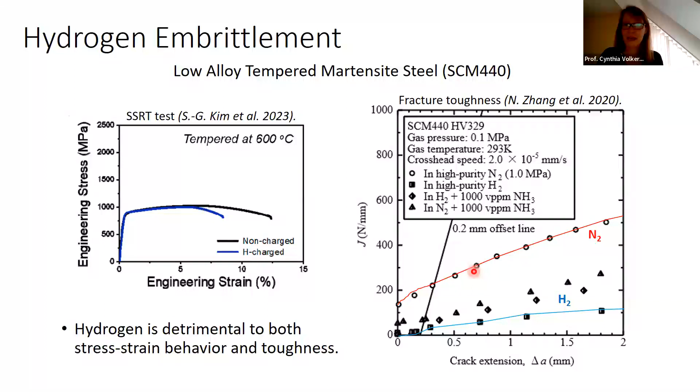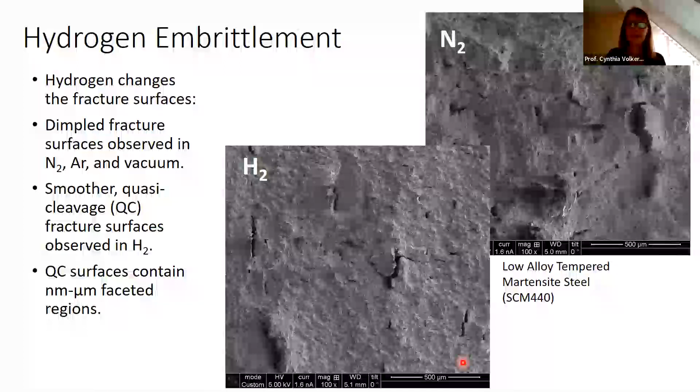If we go in and look more carefully, one finds very distinct behavior on the surfaces. At first glance, if you're not used to looking at these, you might think there aren't big differences, but in fact there really are important differences. If you look at the case fractured in nitrogen gas, and if it were fractured in argon or vacuum it would look similar.

We have features that we call dimples, small openings, and as concluded throughout the literature, these dimpled surfaces result from voids forming and coalescing at the crack front. What you see here is basically half of the surface of a void that has coalesced to form this fracture surface. You'll also see occasional round features like this one I'm pointing at - that is a precipitate, a carbide precipitate, found on the surface of these fracture surfaces.

Now if we look at the hydrogen case, it looks quite different. Here you see there are almost no dimples. You might argue there are some dimples over here, but to a large extent it's dimple-free, and what we have are small facets or small steps that are fairly flat. We also have some larger regions that are quite flat, and because macroscopically this looks flatter, as you saw in the previous micrograph, one talks about these surfaces as quasi-cleavage surfaces.

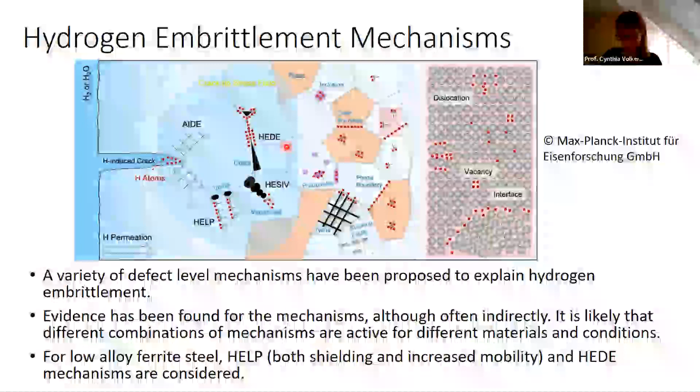It's clear that one wants to gain control of this hydrogen embrittlement problem, but as I've just said, it involves defect dynamics that are at the atomic scale. So if one wants to really understand which mechanisms are active, to find ways to mitigate the problem, one needs measurements and methods that give atomic scale resolution and sufficient temporal resolution. That's already a challenge. In addition, hydrogen is the hardest element to detect because of its lightness. And let's add to that the fact that crack propagation is typically very often an unstable process.

So if we want to look at what's happening at a crack tip, we have to find a way to control the propagation of the cracks. These are the challenges one has if one wants to look at this problem at the atomic scale, and with time dynamics, we need some kind of temporal resolution. I think it's clear that a single experimental or theoretical method will not be able to do all of this, and a variety of methods must be used.

The one that we want to offer here is in-situ transmission electron microscopy. The promise of that is that it gives almost atomic scale imaging of dynamic processes. Real-time resolution is easy in the microscope, and if one has a lot of funding for expensive cameras, one can also go to even shorter temporal resolution, faster resolution in the time regime.

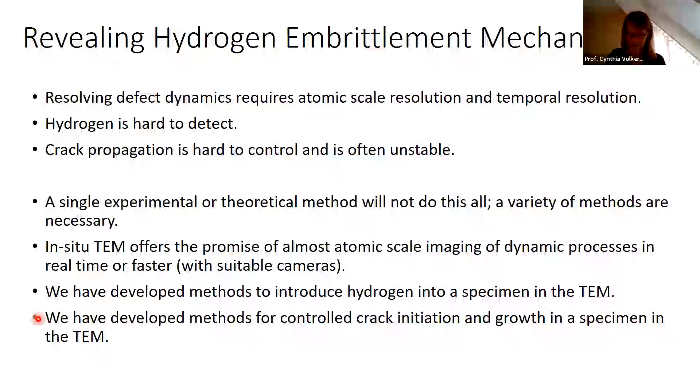But there are, of course, some challenges to the TEM results, and I want to start with those and be upfront about them. Let me list them here. The first is simply the fact that the electron beam does produce damage in a material.

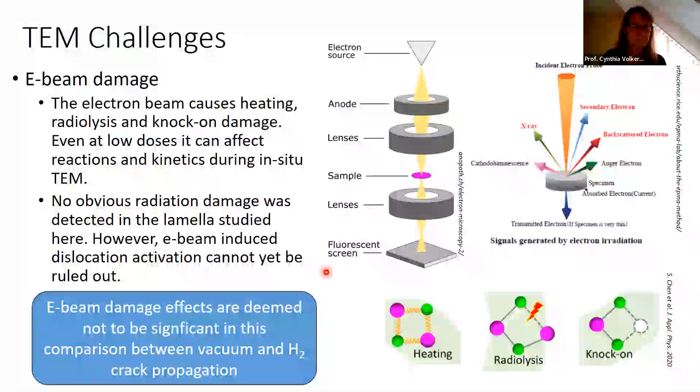Another thing that's always a question, particularly when one tries to introduce hydrogen into these microscopes: there are so-called environmental microscopes, which is what we have, allowing us to put low pressure—up to around 10 millibar—of hydrogen into the chamber. The studies you'll see today are performed at 2 millibar. For all of those who work with hydrogen embrittlement who will say that's not enough to get anything to happen—room temperature and 2 millibar of hydrogen is not going to cause anything in ferritic steel...

Despite that, in many different materials, various studies across the world by groups that have these environmental TEMs have found that despite these low pressures and despite room temperature, one sees hydrogen effects on the material. So the conclusion is that in some way the electron beam inside the microscope is significantly increasing the fugacity of the hydrogen, so that we're producing enough hydrogen in a state that it can get introduced into the ferrite in this case, or into the other materials in other studies, that in fact we do have significant hydrogen in the material.

Now, there are known cross sections for electron-induced gas phase dissociation. And if one simply uses those values, we would predict an increase in the amount of dissolved hydrogen over what one would expect for 2 millibars at room temperature by a factor of 100. Might be enough to make some difference.

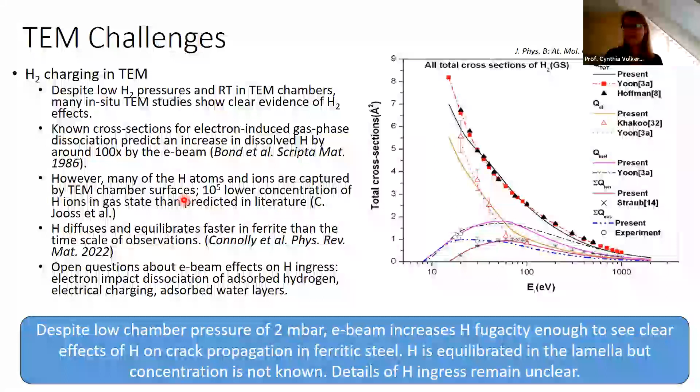One thing we can say is that in ferrite, for the time scales and length scales we're dealing with in these lamella, the hydrogen will have had time to diffuse and equilibrate. So whatever concentration of hydrogen we have in the specimen, it's been able to find its preferred sites within the material, and it's free to move and equilibrate there. These are huge issues one has to think about. In our case, the result is we don't know what the concentration of hydrogen in our specimen is, but whatever it is, we believe it to be equilibrated.

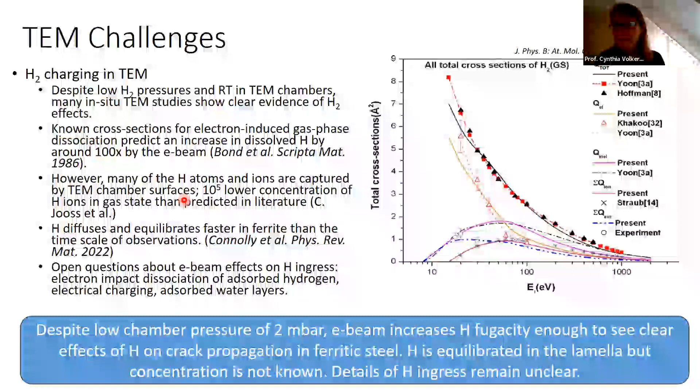If we think about a bulk specimen, out of the plane of the view graph the material extends infinitely, or quite a long way. So the stress state here is what's known as plane strain, and the so-called triaxiality is high, which means that plasticity is low. If this is a thin film like a TEM lamella, then plasticity becomes much, much higher - we're in a situation of plane stress. The nature of these stresses, this triaxiality - whether all the stresses in all three directions are equal - is a measure that's very important because it controls the amount of plasticity that can go on. This is completely different in a TEM lamella than in a bulk specimen, and this is a difference we cannot ignore.

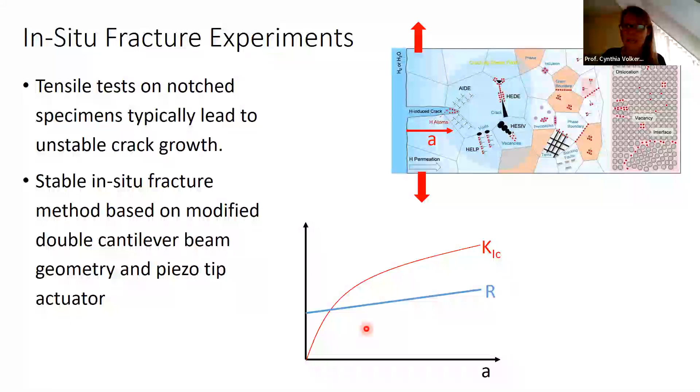So we made a different design, which is a modification of the so-called double cantilever beam geometry. You can see the geometry here. We cut out two posts of material with a thin lamella in between, around 150 nanometers thick, which we look through with the electron beam.

We cut a notch in this material, and then we come in with a wedge-shaped tip and pry these two cantilevers apart, causing this notch to form a crack, initiate it, and propagate down this lamella.

Now, the advantage of this geometry is that the K1C, the stress intensity factor, decreases as you move down, simply due to the bending moments of the two cantilevers at the side. So the geometry makes it harder—we have to push harder to pry it apart—and that gives us, in a very simple way, much better control over propagation of the crack. That's the trick we use here.

It's been used for a variety of different studies over the years, where we started out without the hydrogen to make our life easier, but our goal was eventually to get to these studies that I'll present today.

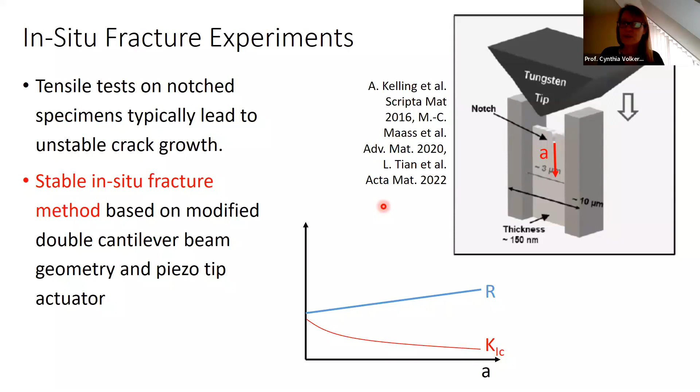I would like to show, just because it was really fun for us, a study that we did on wood using this method, just so you can see what kinds of things can be done with these kinds of methods. Now, wood, as you know, is a material that if you try to fracture it across the grain, it's very difficult to fracture, whereas if you fracture it along the grain, it tends to fracture quite easily.

We wanted to understand this fracture along the grain, which is otherwise difficult to study because it's unstable. In our case, because of our method, we could watch this propagation along the grain in the wood. Now, wood is very susceptible to electron beam damage, and the image you see here is from an SEM instead of a TEM, and that's where this study was performed. The TEM was too destructive. We had to work in the SEM.

I won't go into the details, but we were able to watch these cracks propagate, and you see a sketch of what we observed here. The thing that we found really fascinating about this is we believe that learning from the structure of wood, this study showed a new concept for how one can make fibrous materials tougher.

The basic idea in wood is that it's arranged the fibrils so the cracks are steered to a particular interface. At this interface, the fibril direction changes, and the cracks get hung up. They have to stop, they have to tear and rupture the fibrils, which requires a lot more energy before they can continue on. So basically, the material is designed so that it steers cracks to a very tough interface, and the cracks get trapped there.

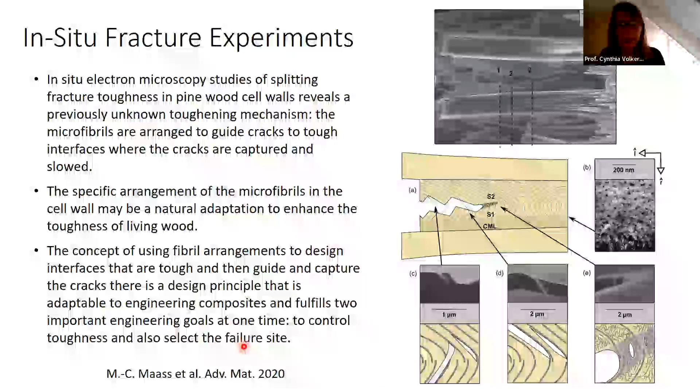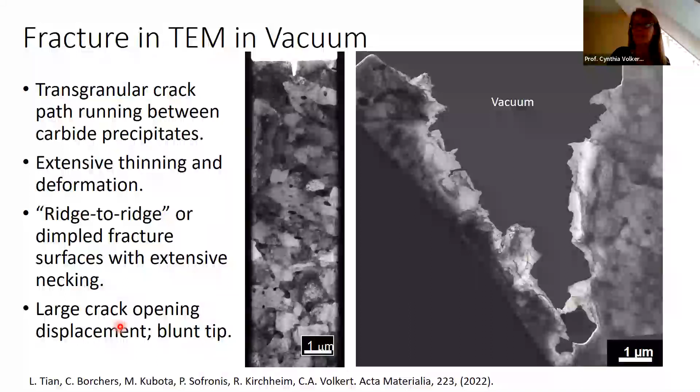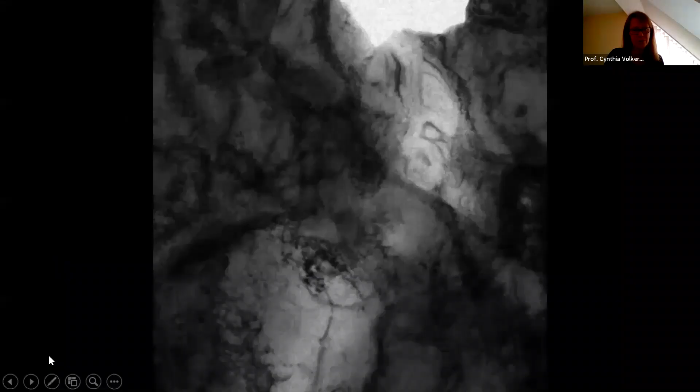And now I'd like to show you a video of this. So here in this image on the left, you see the notch that's been produced and a crack that's been propagating. You can see it's quite blunt, and this is a thinned region ahead of it. Now we're going to see what that looks like in the TEM.

There's a lot of things going on here. What one sees are a variety of things. I think I'm going to play it a second time. You see contrast from bending contours—that's simply from changes in thickness, or bending from diffraction.

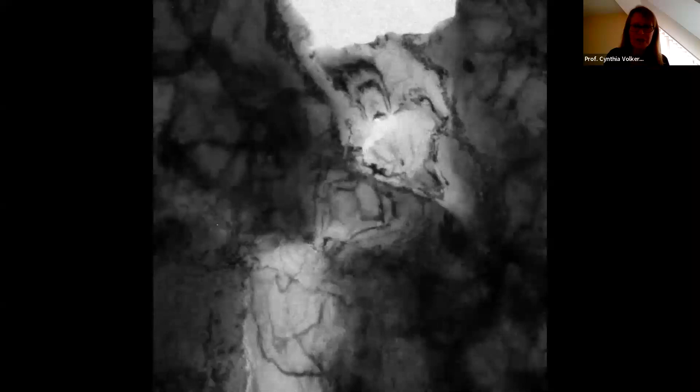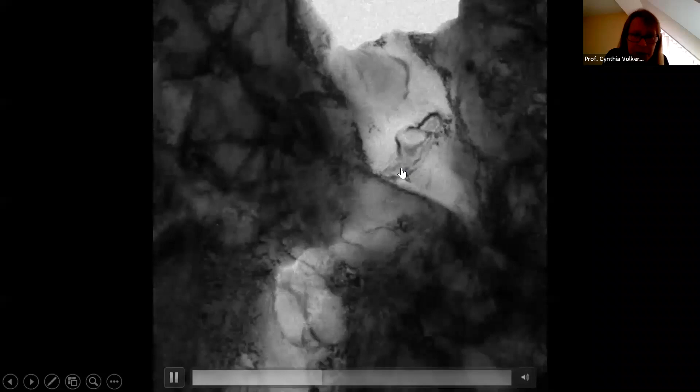You see voids opening up, nucleating and opening up ahead of the crack tip. So here's a void opening right now, and there'll be one opening further up down here as well. So there's a chain of voids opening ahead. A lot of the features you see are bending contours, but there's also dislocation motion going on. So that shows you what it looks like.

Here you can see the tip emitting dislocations. Most of the features you see here are in fact the rapid motion of dislocations, and they appear to be emitted from the crack tip in this case.

So these are the types of images Lynn made in a number of these tests. What you see here is characteristic of this material. During each test, the crack propagated through many grains, so each test involves a variety of different grain orientations and microstructures. What I'm showing you here is characteristic of this behavior in the vacuum.

In the TEM, we see that the holes nucleate ahead of the crack tip, and they join up and coalesce, and that's how the crack propagates. So here it is summarized: you can see it thins down first by dislocation activity, and once the region is thinned, holes open up in the lamella, between the precipitates rather than next to them, and they then coalesce, giving a crack path that moves through the ferrite matrix.

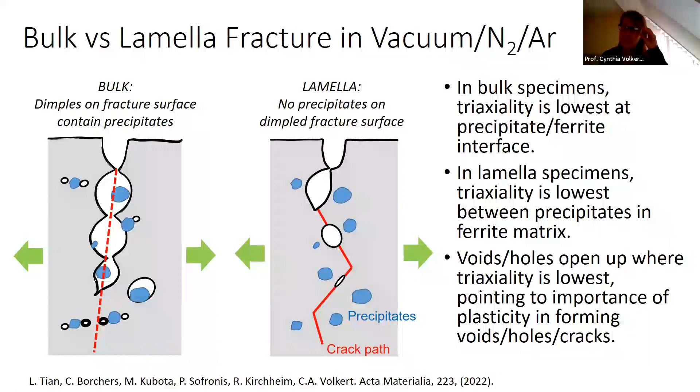So in our opinion, we can bring the TEM results and the bulk results together under one picture, and argue that what we're seeing in the TEM reveals mechanisms that may also be controlling in the bulk case. There are some important differences due to the differences in stress state, resulting in differences in the fracture surface. Now let me go on to the hydrogen case, which is of interest here.

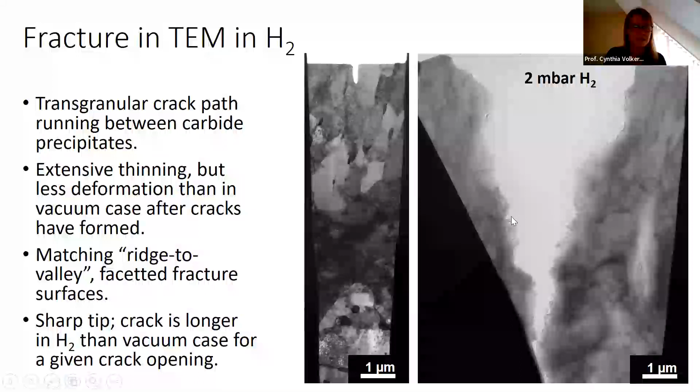Let me show you the video so you can see how different that is. Here's our notch, and you can see something just happened down here. You're going to start to see a zigzag crack opening here in the material. You can see this crack now quite easily. There's still a bridge up here, but that's going to open up and the crack is going to propagate. So what one sees here is a very, very different process.

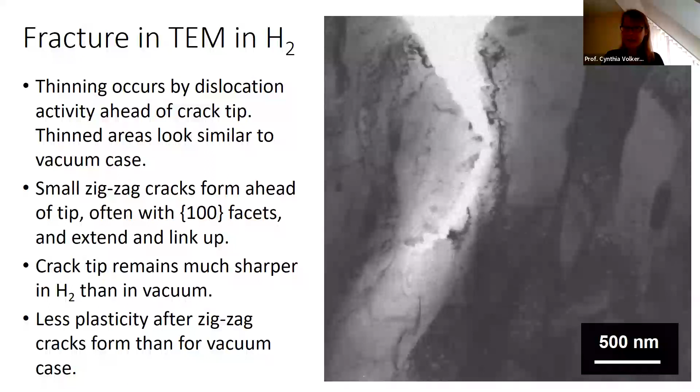This is something Liang observed not just one time, but in several specimens, and in different grains as the crack moves through the specimen. So what one sees is that thinning occurs as before due to dislocation activity, but ahead of this crack tip, instead of holes opening, we form these small zigzag cracks. They grow and link up, and that leads to propagation of the crack, so the crack remains sharp even though there has been significant thinning to begin with.

If we look very carefully at these surfaces, you can see they tend to have 100 orientations, these facets. They're not crystallographically sharp, but the tendency to be lined up with the 100 surface is very prevalent. Sometimes we form new grains, and that happens for both hydrogen and vacuum. I won't be talking about that much in this talk, but we see what we call the zigzag crack formation, and that's something we do not see in the vacuum case. So this is a distinct feature of the hydrogen fracture case.

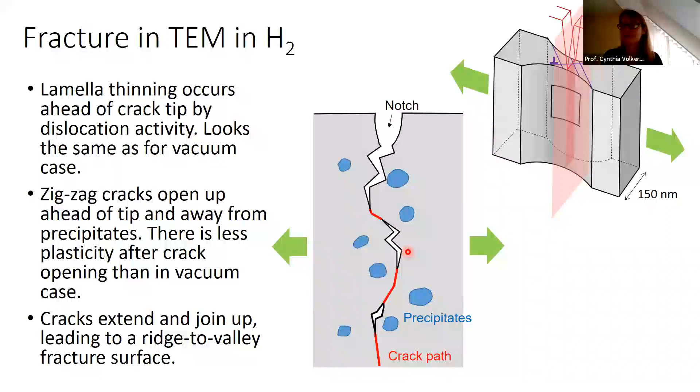Summarized in this schematic, we first thin down ahead of the crack tip, as you see here on the upper right, and then the crack propagates by formation of these zigzag cracks on 100 facets ahead of the crack tip. These link up and lead to a ridge-to-valley fracture surface, which is very distinct from the ridge-to-ridge fracture surface we have in the case of vacuum. Summarized here, the difference between the two - these dashed lines are meant to indicate the thinned regions. We see a very distinct difference in how these cracks form and in the resultant crack surfaces.

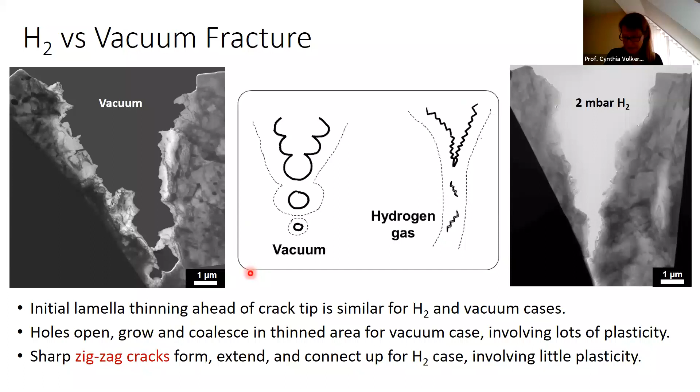So the question we have now is, why are zigzag cracks forming? What are the possible mechanisms for that? And why is that promoted by hydrogen and not observed in the vacuum case?

There is a study out there on gold without any hydrogen showing zigzag structures. It's not something we found to be very common in the literature, these kinds of structures. In that study, they explain this by arguing that these features are formed by either shearing or twinning, activated by whichever has the maximum resolved shear stress. So the simple picture is that if the applied stress activates dislocations for shearing or twinning, then that's what will happen, and the deformation results in these zigzag surfaces.

For our case, if we look down, we can see we have quite similar type of features. We could argue that if dislocation motion in the hydrogen case is easier - the HELP mechanism - then we could imagine the following scenario: dislocations like to glide on 110 planes in BCC iron, and if we have that happening unimpeded at a crack tip,

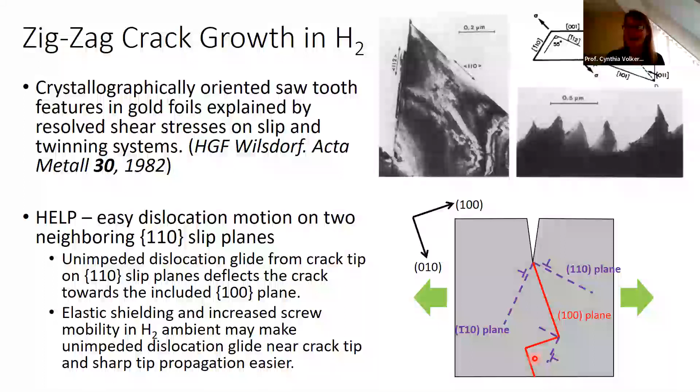The other argument one could bring here is based upon the decohesion model. If, for instance, hydrogen lowers the surface energy of the 100 surfaces significantly, then one could imagine that as we thin the lamella down in front of the crack tip, eventually the stresses are high enough to cause cleavage along 100 surfaces. There are some calculations supporting the reduction of surface energies also on 100 for ferrite. However, the effects tend to be small, on the order of 10%, and the general feeling is that might not be enough to account for this effect.

It does, however, depend upon the amount of absorbed hydrogen, so it's a little bit difficult to say. It seems to me that both of these mechanisms remain possible arguments for what we're seeing in our material.

I'm getting just about done.

I would like to now go to the question of what we learned in the lamella case for hydrogen: can we use that to explain the quasi-cleavage fracture surfaces that are observed in bulk specimens?

We believe that's the case because our surfaces tend to be somewhat straighter and flatter. We would argue, it's a fairly phenomenological argument, that if the crack tip remains sharp, the crack will tend to propagate where the applied stress sends it, and it's less sensitive to the microstructure, so it will tend to be flatter to begin with.

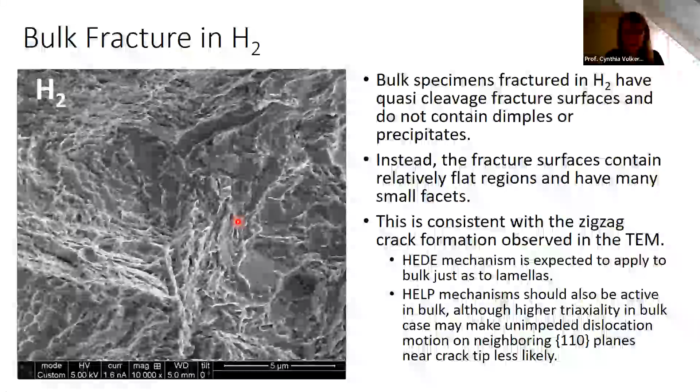Both of the mechanisms I propose could be active in the bulk case as well. We're unable at this point to tell you which mechanism we think is dominant here. Maybe both of them are active—that can entirely be the case.

This is a rather long list summarizing what I've basically just said. The point I want to bring up is that in both specimens, before the crack propagates, there's significant thinning. So far we have not seen a difference in the effect of hydrogen in that initial plasticity ahead of the crack tip. That's something we're going to look at very carefully, because that's basically the evidence for a HELP mechanism—it would argue that the plasticity should be different in the two cases. So far we have not seen evidence for that, so that's something we need to look at more carefully.

But once it's thinned and the stresses are high ahead of the crack tip, we see very distinct behavior between the hydrogen case and the non-hydrogen case. In one case we get holes opening and dimples forming, and in the other case we get these zigzag cracks, which we think can account for the quasi-cleavage surfaces one finds in bulk materials.

I know I rushed through these things at the end, but as is often the case with research, we've seen a lot. We've got a lot of observations, but we have more questions and more studies we need to make in order to really tackle which mechanisms are dominant here. But we think these kinds of methods offer an important way to understand what's going on in these materials, and that it's possible to extrapolate from the stress states of the TEM lamella to the bulk geometry if one takes care. And with that, I'd like to thank you for your attention, and I'd be very happy for any questions.

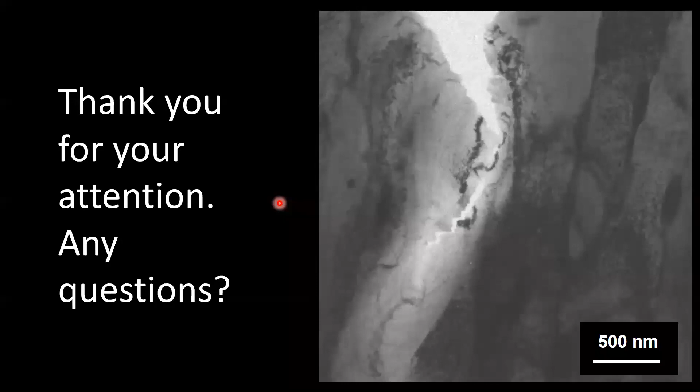Can I ask a question? Please, Professor Makadore. Yes, thank you very much, Professor Volkert. I have many questions like Professor Kubota. The main one is actually the one you mentioned at the beginning—I think it's the question everybody has when you have an atmospheric cell with the TEM: what would be the equivalent? Like you said, you have very low pressure, but it's activated by the electron beam. It would be very nice in the future to know the equivalent fugacity or pressure, but like you said, that's a very difficult question. Related to that, I've also been working on looking at data from pure iron with hydrogen before, and one of the last calculations I've seen was by a group with Dr. Yu in 2020. They reported that in their calculations they didn't see any evidence for the HELP mechanism, and they reported only that the dislocation core would change with hydrogen—specifically the core radius.

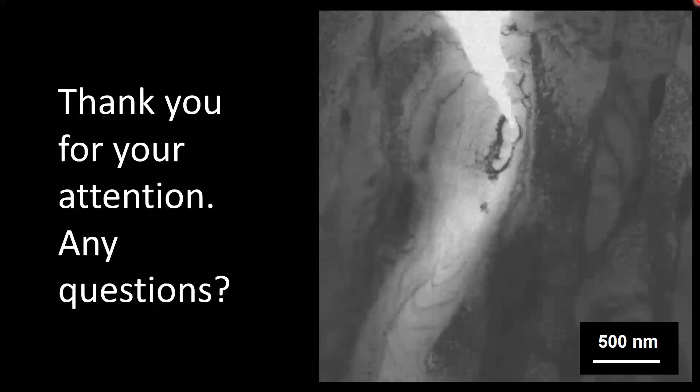This has also been hinted at by Professor Barnoush with nano indentation, who said maybe the shear modulus decreases with hydrogen, and maybe the core radius increases. There have been a few papers so far, mainly calculations. The main issue with calculations, as you know, is similar to the issue with thin lamellae compared to bulk: it's only a few dislocations and a few atoms, so it's very difficult to get the effect of the group of dislocations. A lot of data seems to hint that the shear modulus will decrease with hydrogen, but not much data confirms the effect on the stress field of dislocations.

So I'm wondering what your views are on these. Basically, some people have also said that because the electron beam activates the hydrogen a lot, what we see in TEM would be something that cannot be seen under usual hydrogen exposure conditions, because the fugacity is too high. So it's a true thing that's happening, but it may not reflect reality at room temperature and usual hydrogen gas pressures. Sorry, I'm rambling a bit, I want to know your thoughts on those random questions.

Okay, thank you, those are really good points you brought up. I'll say a few words about the fugacity, though I don't think I'll be able to answer your questions in full detail, but we'll have opportunity to discuss this further. Your point about fugacity is possible, that it's raised to unphysical values by the electron beam. That's something we simply don't know, and I don't know of a way to determine it, because it depends on all kinds of things, like where you're looking on the specimen relative to the edge of the holder, and details of the chamber geometry that will differ for every experiment. I think coming up with a specific prediction for the hydrogen fugacity in the TEM will be very, very difficult.

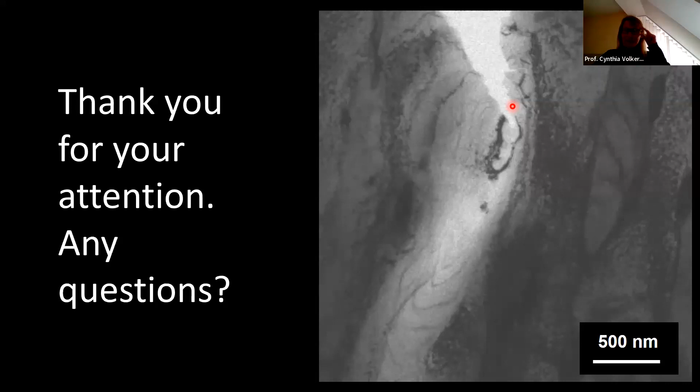As far as the shear modulus, I need to look into those - I'm afraid I'm not all that well informed about where that stands. You can have a change in shear modulus because you've changed the bonding, which of course requires a very high concentration, or one has inelastic or anelastic contributions. Maybe we discuss that here further, or maybe we save that for another point. In the meantime, I will look into that literature more carefully.

Thank you very much, you make a good point about the lattice constant. Actually, I've seen it in stainless steel by XRD.

We can see the increase of lattice constant with the increase of hydrogen exposure pressure. So maybe there is something to do like bulk measurements and then compare with what you see in situ with the TEM.

The point about the shear modulus is that, from reading a book mostly by chemists about hydrogen embrittlement, it seemed obvious to them that the bond would change from a more metallic aspect, switching between metallic and covalent bond, from one to the other. But I don't think it's been so much talked about in the more material mechanical engineering community, so it's something I think we should look at.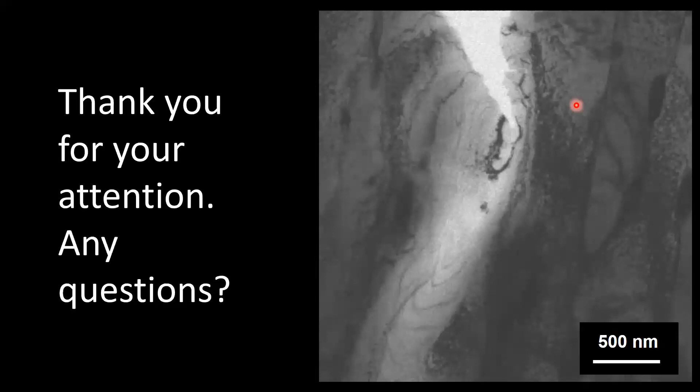So anyway, it's something that's hinted at in the literature, but has not been completely confirmed yet. I think it's an interesting point, but we should look into it. Sorry for the rambling again.

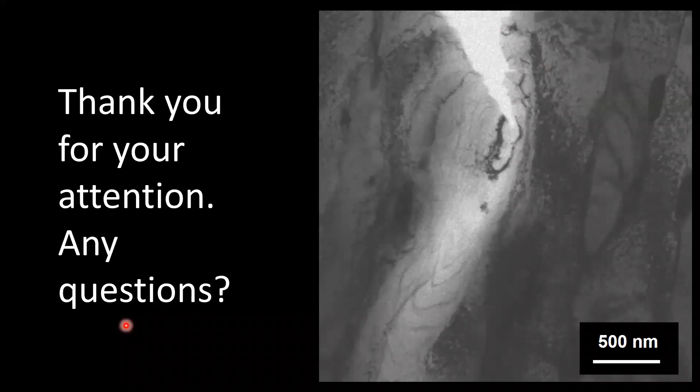Thank you, Arno. So 2 millibar hydrogen is enough to change the fracture mode. So if the hydrogen pressure is 1 millibar or 0.5 millibar, what happens? Can you expect anything?

Without the electron beam, 1 millibar of hydrogen at room temperature in ferrite, I do not believe will lead to significant dissolved hydrogen to change the crack propagation behavior. That's something I have learned from talking with you and colleagues—we would not expect that to change the crack behavior. And that's why we conclude that the electron beam and the conditions in the microscope are significantly enhancing the fugacity of the hydrogen.

We are not the only ones to see that. There are many studies on different materials, in different countries, with different microscopes, that show that very low pressures of hydrogen, below what would be expected outside of the TEM to produce an effect, can produce a large effect in the TEM. So the fugacity is raised, I think, is clear from the observations. How it's raised remains a mystery.

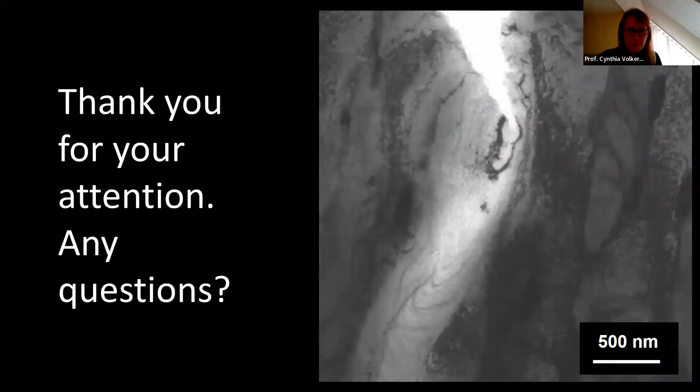Yes, these specimens were prepared by focused ion beam. I was trying to move back to the image of the specimens—they were prepared with the focused ion beam, and there is of course damage at the surfaces. So this geometry you see here is all cut with the focused ion beam. That's correct.

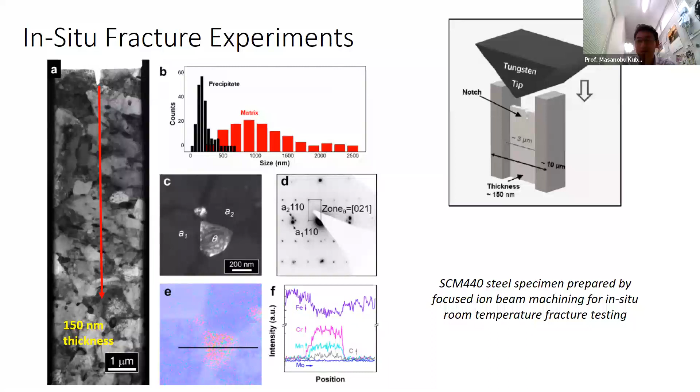So Petros observed beneath the fracture surface, created in the presence of hydrogen, by the pick-up TEM technique—site-specific TEM, combination of FIB plus TEM—very significant evolution of dislocations beneath the surface in the presence of hydrogen. So do you have any common feature with their observation in your experiment?

Yes, I'm familiar with those studies showing that, if I recall correctly, some of the features on the quasi-cleavage surfaces, such as we show here, can be associated with significant dislocation activity. So we see significant dislocation activity in our specimens before the zigzag cracks open.

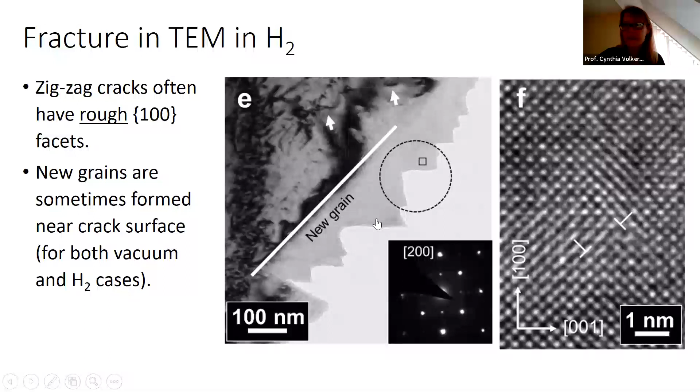I'm now going to go to another view graph. Here, the fact that these features are not purely crystallographic, and yet the tendency towards roughly 100 is very strong—one way to explain that would be to say these are in fact cleavage planes that have subsequently undergone dislocation motion, leading to roughness. I believe that's the argument I tried to show a little bit later: that we would get roughness at these 100 facets due to dislocations that showed up after the zigzag crack moved through.

Once the zigzag cracks are formed and link up, associated with the zigzag crack formation is not as much plasticity as for the case of the holes. I think that's fairly geometrically straightforward, but there is plasticity continuing. So there's nothing we've observed that disagrees with those observations.

A direct connection is the kind of thing we're hoping to get more information from. We're really hoping to find a way to get more information about the nature of the dislocation motion and arrangements ahead of the crack tip. That's very difficult, but that's our hope, is to get more information and to look for differences between the vacuum and the hydrogen case.